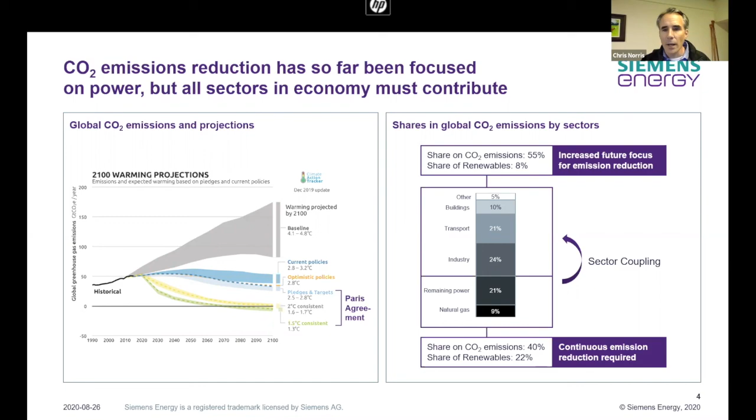This is why green hydrogen is so important. Shares in the global CO2 emissions show that buildings, transportation, and industry contribute a significant amount of GHG emissions. What we're really focused on in terms of sector coupling is how do we decarbonize not just the areas of the economy that are straightforward to decarbonize, like electrification of mobility, but how do we really decarbonize deeply the sectors that are not easy to decarbonize.

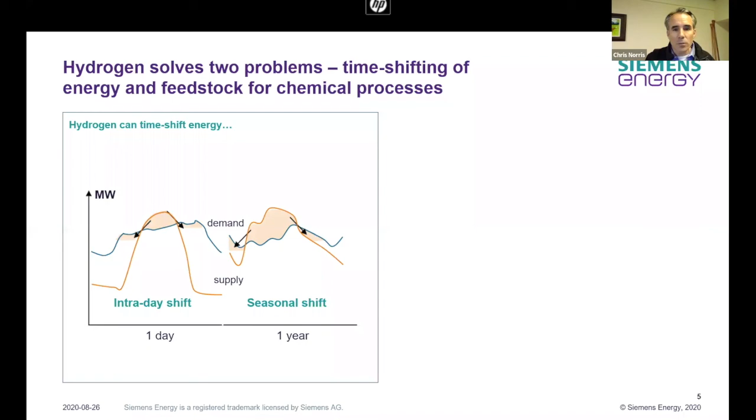Hydrogen solves a couple of problems, and the solutions hydrogen provides certainly vary by jurisdiction. We know Quebec is a unique jurisdiction in terms of how it produces energy. One of the things hydrogen can do is act as a store of energy for intraday shifting from peak supply and demand, and also seasonal shifting in terms of long-term storage in various methods available, from direct storage of hydrogen to creation of synthetic fuels.

On the right is really the essence of what we call Power-to-X, with e-hydrogen in the center, and on the left the sources of renewable power: wind, solar, and particularly hydro in the case of Quebec. We see that there are a couple of areas where the economy can focus on decarbonization through direct electrification - the top one through heat pumps for the building sector, and below through mobility.

But what we also see is that through e-hydrogen, there are a lot of other difficult to decarbonize sectors. For one example, ammonia, from which fertilizer is derived, produces on the order of 800 megatons of carbon dioxide per year, which exceeds the European production of GHG emissions from its entire electricity sector. These unseen and less than obvious sectors of the economy, which emit a tremendous amount of carbon dioxide into the atmosphere, are areas with primary interest in decarbonizing through e-hydrogen or green hydrogen.

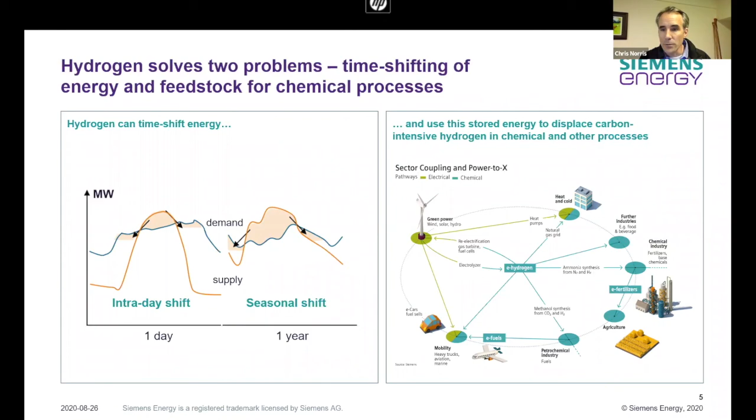I think we're all here because we realize Quebec is well poised to be a key player in the green hydrogen space. One of the things Quebec is known for is its abundance of clean energy. We see on the left an indication of where GHG emissions come from by sector, and the electricity sector is essentially too difficult to see in 2017 and onwards. That tells us the target for decarbonization in Quebec is in these other sectors of the economy.

Much of the discussion around grid modernization and decarbonization comes from decarbonizing the electric sector, but in Quebec, clearly that is well in hand. The middle image shows what is widely known about Quebec - the vast majority of electricity comes from renewable hydro generation with a tremendous installed capacity of almost 37 gigawatts.

On the right, the hydropower is produced quite a distance from consumption and load centers. That's a challenge that's been addressed by Hydro-Quebec, and it provides potential opportunities, especially in areas where hydropower is produced relatively close to deep water ports and tidewater, for export of commodities derived from green hydrogen.

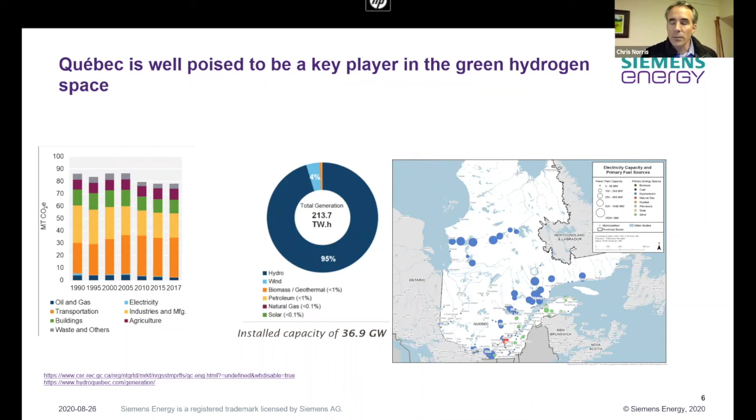So the hydrogen economy will support CO2 reduction, of course, depending on legislation and the early support of the industry, as well as the emergence of scalable solutions.

Here on the left, we talk about what are the types of hydrogen. There's a global demand for about 70 megatons of hydrogen, and as a negative side effect, there's emissions of about 830 megatons of carbon dioxide per year, just in the production of gray hydrogen.

Here we talk about the different, what we're colloquially using as the colors of hydrogen, but there's development in the sense of how we're going to define hydrogen in the form of its carbon intensity and its source. I think this terminology will serve out its usefulness as we develop carbon intensity targets for different types of hydrogen.

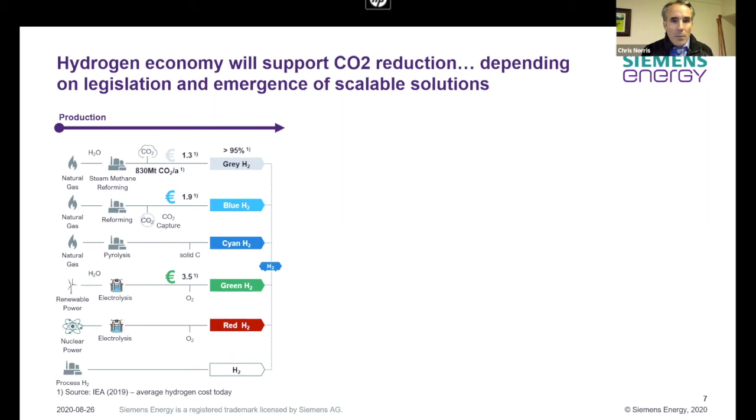But natural gas, as you can see, forms a significant portion of the global supply of hydrogen, with renewable power providing only a small portion of it currently. But that means there is an ample market and a growing piece of the pie for green hydrogen.

Now, how do we get it to market? There's several ways. One is pure hydrogen or blended hydrogen, and I think we'll discuss that more when Énergir and Catherine speak about their role in the hydrogen sector, both from a pure and a blended hydrogen point of view. There's also being able to move it from place to place in the form of liquid hydrogen or adsorbed hydrogen. And then, of course, the synfuel and chemical pathway, the creation of methanol and ammonia, both topics of significant discussion in Quebec currently.

Of course, there's the re-electrification pathway, one that is focused on elsewhere in North America. I think one of the reasons we want to highlight that in this discussion is because, despite the large demand for hydrogen in Quebec, Quebec is not only a great provider of low carbon power for the production of green hydrogen, but it has a lot else going for it in terms of post-secondary institutions, research and development areas, and a lot of things that can service markets outside of Quebec, as well as storage.

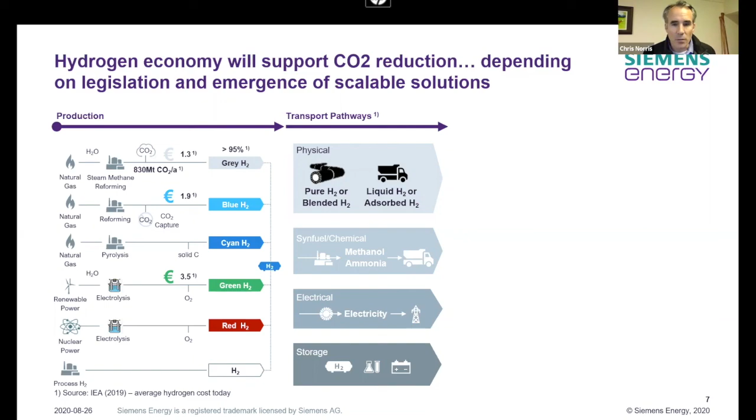Storage can be defined in multiple different ways. There's the storage of electricity where it can be re-electrified at a later time. There's storage in the sense of using hydrogen to offset future demand. And then there's the type of storage that is involved with production of a substance that will offset the demand for electricity. Hydrogen really has a role to play in each of those storage types.

From a consumption point of view, all I want to convey here is that there is tremendous demand for hydrogen globally for multiple different uses. And the question is, how do we use this opportunity to substitute green hydrogen for the type of GHG intense gray hydrogen that has been the source of most of the hydrogen in the past.

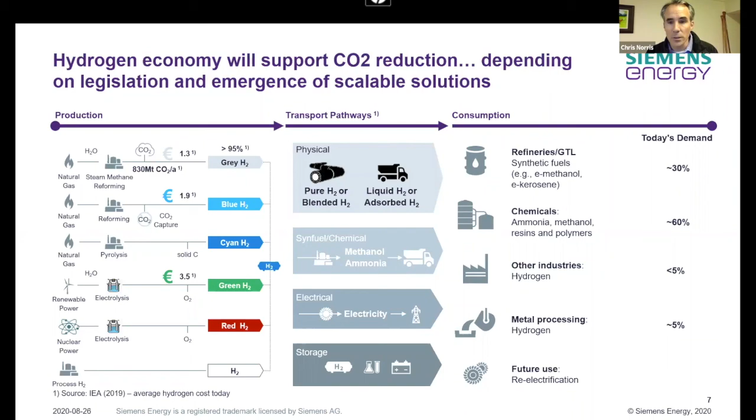So I hope this sets the stage for the reason that green hydrogen is so important, especially in the Quebec economy, in the Canada economy, and also in the post-COVID recovery stage that we're in the economy.

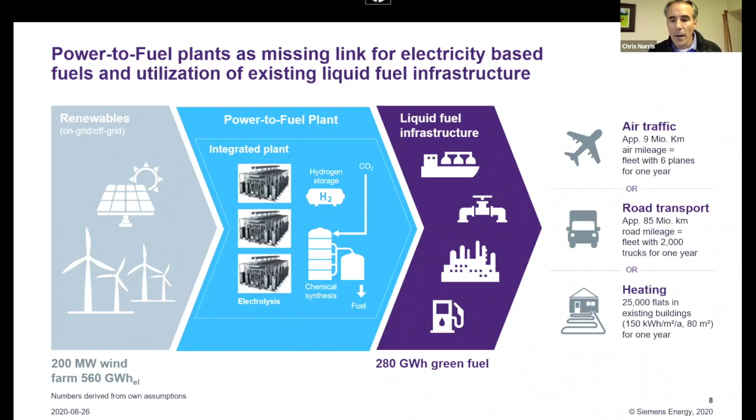And with that, I want to turn it over to my colleague Omar, who's going to talk a little bit about the Siemens offerings. Thank you, Chris, and thank you everyone here for the opportunity. I will be brief in my presentation, but I will basically cover some important points so that hopefully will trigger some thoughts and ideas for discussion later on.

So Siemens has been in the business of electrolyzers since 2011, where we basically developed the technology and we did it at a lab scale demonstration facility where we eventually transitioned into commercializing the product line with the Silyzer 200, which is an electrolyzer that draws roughly 1.5 megawatts of electricity to produce hydrogen.

Our current portfolio consists of the Silyzer 300, which I will describe in more detail in a little bit. This Silyzer 300 draws roughly 17.5 megawatts of electricity to produce 340 kilograms of hydrogen per hour. What's important about this slide is that we at Siemens have developed the technology in such a way that we are modularizing our designs to eventually scale up the amounts of hydrogen that we can produce.

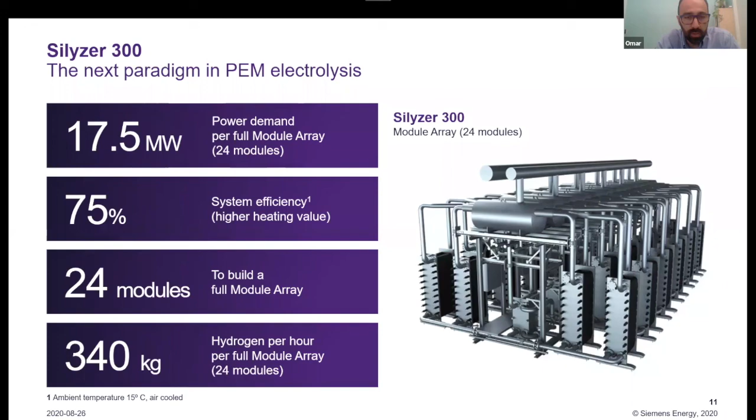So when we talk about this electrolyzer, the Silyzer 300, I mentioned already the draw of electricity. It has an efficiency of 75%, and it's a modularized design. The reason for that is so that we can scale it up in the future in modules to be able to reach higher quantities of hydrogen production per day. It draws 17.5 megawatts of electricity, and it produces 340 kilograms of hydrogen per hour. If you move on to the next slide, please, Chris.

So one important topic we need to discuss is efficiency. When I showed the first slide, I mentioned how we want to scale up hydrogen production. In terms of efficiency, we expect that this will continue to develop. However, there's only so much we could do with the thermodynamics or the mechanical aspect of efficiency in this case. But our PEM electrolyzer has an efficiency per module of more than 77%.

Now, when you start considering all the transformer heat losses, the rectifier losses, and all the auxiliary system losses, you basically get to the 75% efficiency aspect. This PEM electrolyzer delivers hydrogen at atmospheric pressure, which means depending on the end use of this hydrogen, you will probably need to compress it. So when you add the compression and cooling systems to the balance of plant, your efficiency will go down to 74%, and then eventually you will end up roughly at 72% at the end of the entire balance of plant.

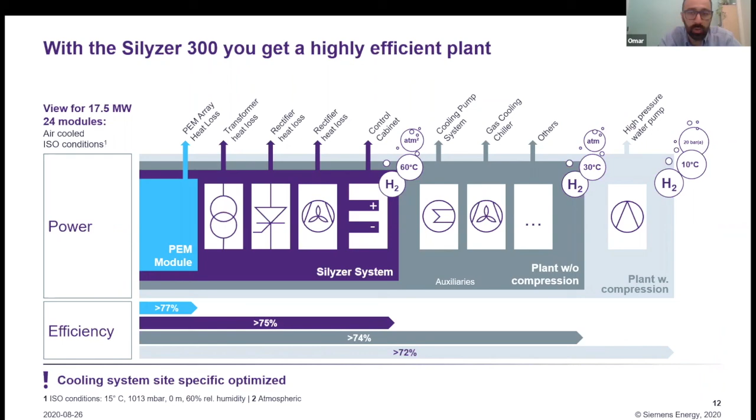So what I wanted to convey is that we can only tweak so much in each one of these aspects, and eventually, hopefully, we'll be able to continue to improve the efficiency to higher levels as we develop more efficient systems in each one of these auxiliary systems. Would you mind moving to the next slide, Chris?

One important aspect of the Siemens electrolyzer is that, because of the background Siemens has in the energy industry and power generation, we made sure that the Siemens electrolyzer provides good dynamic response. So one of the key characteristics of this electrolyzer is that it could be turned on within 60 seconds, delivering full hydrogen production within those 60 seconds, and then you, as the operator of the electrolyzer, being able to ramp it up and down in a dynamic response range of 10% per second.

So when you look at this, you can consider it as a grid support service. And when we talk about grid support service, we can think of many different aspects, but for now let's oversimplify it as an electrical load that can satisfy demand response. The rectifier load of this electrolyzer can reach full load being consumed within 30 seconds of turning on the device, and like I said, we can also turn it up and down at 10% per second as necessary.

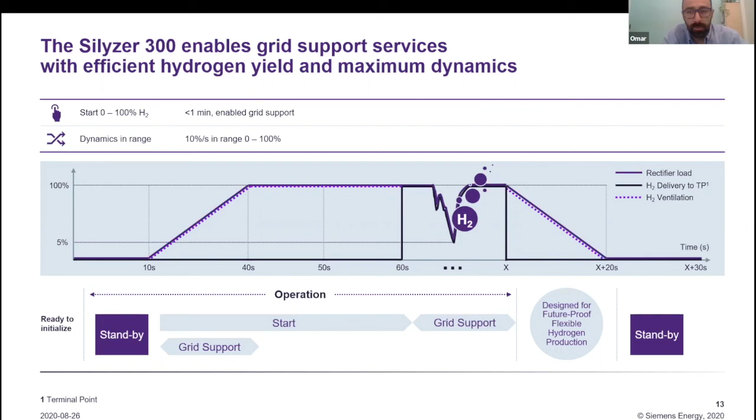So would you mind moving to the next slide, please? The electrolyzer itself, I mentioned it earlier, it's not only the electrolyzer, but it comes with the entire balance of plant aspect that needs to be considered when we're looking at Power-to-X aspects. I don't think there's much to talk about here, just wanted to show a pictorial aspect.

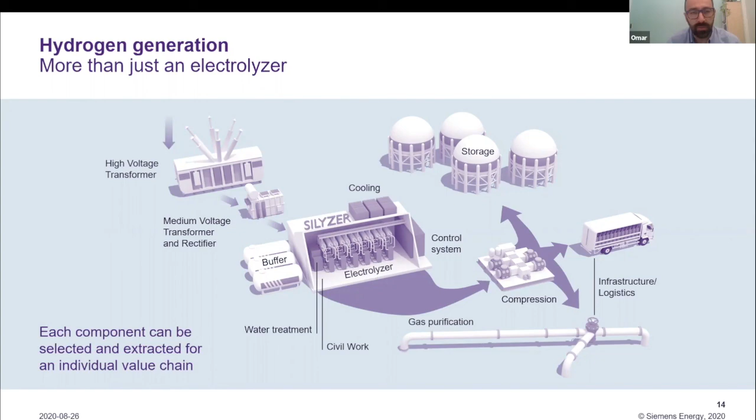But what I do want to talk about, maybe on the next slide, is that Siemens has a vast... would you mind moving to next, Chris? Thank you.

Would you mind moving to the next slide, Chris?

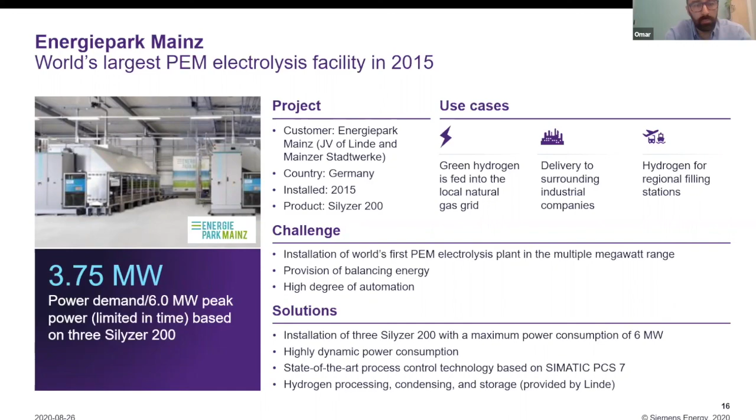So with that, I wanted to show you two business cases and examples of what we have done. One is the Energiepark Mainz, a project in Germany installed in 2015. It's a Silyzer 200, and the interesting thing is that it receives energy from a nearby wind farm and produces green hydrogen, which is used for multiple purposes: blended into the natural gas grid, delivered as feedstock to surrounding industrial companies like fertilization, and used for local hydrogen fueling stations for the transportation sector. So this is a good showcase for the entire application of Power-to-X technologies.

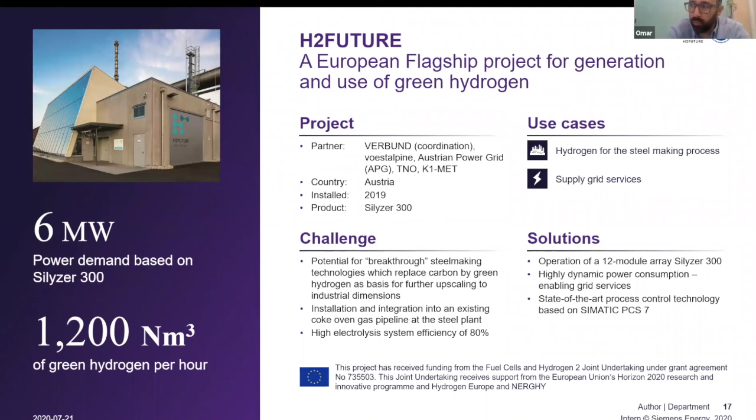Then we have the H2FUTURE project in Austria, where an electrolyzer is used to produce hydrogen that's used in a breakthrough steel making technology process, where the carbon typically used in steel production is replaced completely by green hydrogen. One of the use cases is not only for the steel making process, but the electrolyzer also provides dynamic response capabilities for grid support services in the Austrian region where it works. And with that, I would like to pass this on to Nakul.

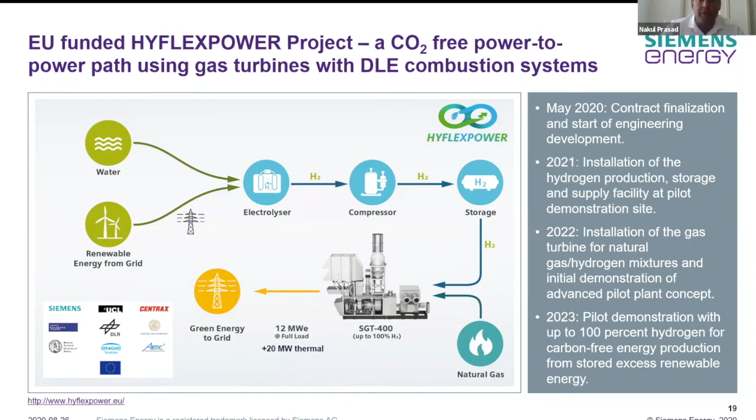And that brings us to the gas turbine part. As we've seen, gas turbines can play a very important role in this hydrogen economy because we have tens of thousands of gas turbines running already worldwide. So upgrading these gas turbines requires some effort, but it's a manageable effort in terms of capital expenditures and R&D.

To give you a snapshot of our portfolio of gas turbines, and what they can already burn in terms of hydrogen content capabilities, the graph is shown here. You can see in our portfolio we have gas turbines ranging from roughly 4 megawatts to close to 600 megawatts in simple cycle. If you run these engines in combined cycle, you're close to a gigawatt at maximum power output. The range from 100 to 600 megawatts is what we refer to as utility scale, and the smaller range is the industrial scale gas turbines.

On the utility side, we can see that most, or actually all, of the engines are already capable of burning 30% by volume hydrogen, using low emission burners - dry low emission burners, meaning there's no water required to abate your NOx. So they comply with any NOx regulations, like 15 to 25 ppm, without using any additional water.

We have a range, the A65, A45, and A35, which are aeroderivative units, and they can be delivered using both dry low emission systems and wet low emission systems, meaning diffusion burners, conventional burners, but using water to abate NOx. And these engines can already run up to 100% using these WLE burners.

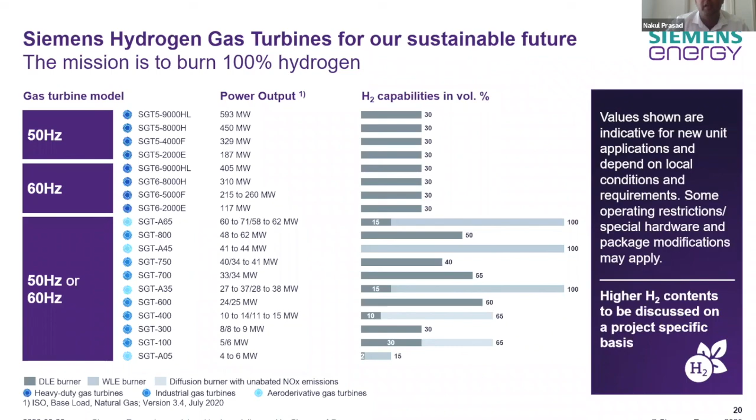And specifically for gas turbines, it's been a talking point because hydrogen often appears as a waste gas in industrial processes, in refineries for instance, or even the steelmaking process. And there's two options: either you flare that gas or you convert it into energy. And that's what gas turbines have been essentially doing for decades now already.

And if you go to the next slide, please.

So we've seen 30%, 60%, and so on. But to really reach our ambition of decarbonizing the entire fleet, running on 100% hydrogen, and in fact we've made a pledge to do that by 2030, still requires a bit of development. And that's shown by the graph here, what the challenges are.

So a couple of things about hydrogen. Obviously it doesn't produce any CO2 because it doesn't have any carbon bound, but it has other challenging properties which need to be managed, especially when combusting these gases. It's got a higher diffusivity, it's the lightest element, so it's very diffusive. We need to make sure that all the sealings and piping systems are managed to accommodate hydrogen, avoiding embrittlement, for instance. It has a lower volumetric energy content, so overall you need larger volume flows to be handled by the fuel system. But the key point is really hydrogen is very reactive.

Everybody knows it, it's very explosive. So what it does is shown in the graph here. On the x-axis, you can see the content of hydrogen per volume, and on the y-axis you'll see different physical effects. The orange line is showing the so-called flame speed, which is kind of characteristic for the reactivity of the flame.

As you can see, at 10%, for instance, in these images, just for orientation, the flame is moving from down to up, so the flow is moving from down to up. We can see that the flame is very distributed, somewhat anchored downstream of the combustor. But as we increase the content of hydrogen, the flame moves faster and faster towards the burner. At 90%, we can see the flame is very compact, very much attached to the burner rim, and it's very faint as well, so there's some detection issues as well.

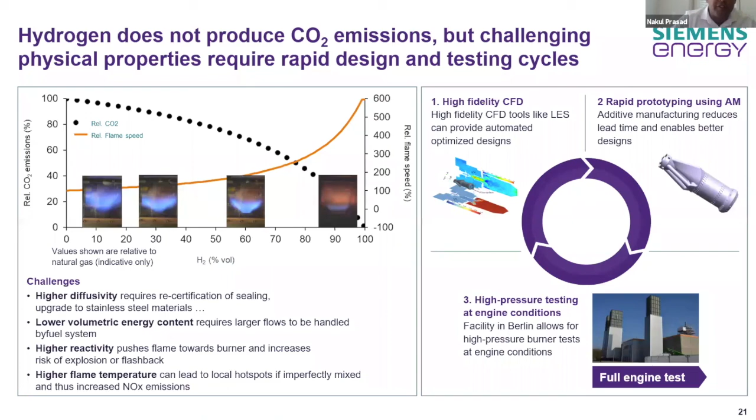So we've seen in the previous slide, a lot of engines can already do up to 30%, but reaching 100% still requires quite a bit of work. So that's something we need to overcome. And we do this shown on the right in a rapid prototyping cycle.

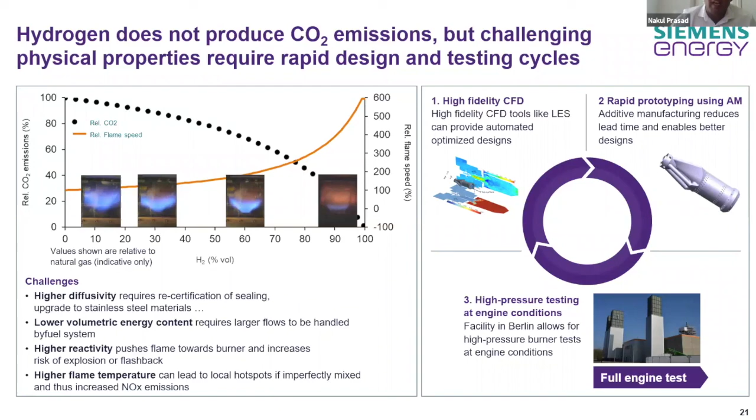Our CFD, our design tools have become much better, computational fluid dynamics. Now we can do time resolved simulations of the flow field, which allows us to do more high fidelity optimization, even automated. And we can print these designs very quickly now using additive manufacturing. Additive manufacturing is a core component now at Siemens, a core manufacturing design, which has not only helped us improve the speed of these designs, but also gives engineers more leverage to play around with much more sophisticated designs, which they couldn't manufacture in the past.

And then we need to test this in a high pressure burner testing rig. So first in a test rig and then in the engine, because it needs to be full pressure, since all of the effects shown before, such as the flame speed, are effects which amplify at pressure. So it needs to be tested in engine conditions.

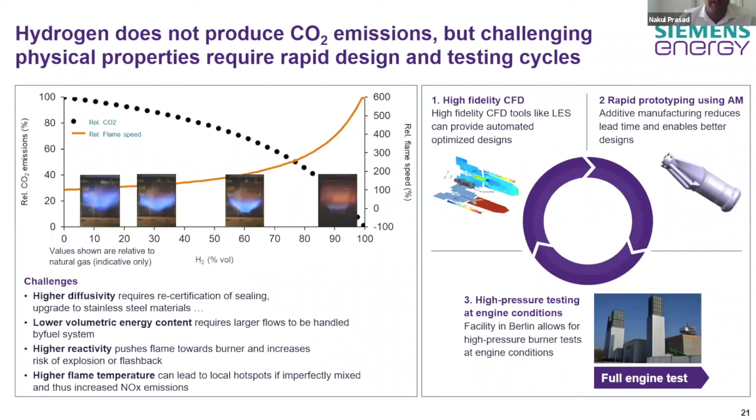And once we've done that cycle, optimized the burners, we then go into the full engine. And if we go to the next slide, just one recent example for one of our engines.

So that's an SGT 600 engine, which is about 25 megawatts rated. We started this with a bit of CFD, then we went into an atmospheric test rig to try and see how the design was going.

We managed to get to 100% using dry low emissions, which was a good achievement. As the next step, we went into a high pressure test, and we were able to reach up to 100% again, which validated what we'd seen.

However, we saw that it increased NOx, at about 40 ppm compared to the 25 ppm we're offering. But that was just the first run. It was a really good testing experience because a lot of the challenging effects, such as flashback and other thermoacoustic effects, were not prohibitive in operating this burner.

So as a next step, we actually went into a full engine. We did some engine tests and were able to replicate quite a few of the tests we'd done in the high pressure test rig. But since this was design version 0, it now went back into the design cycle. Hopefully we'll see this develop rapidly and offer this engine commercially at 100% DLE in the next years.

And if you go to the next slide.

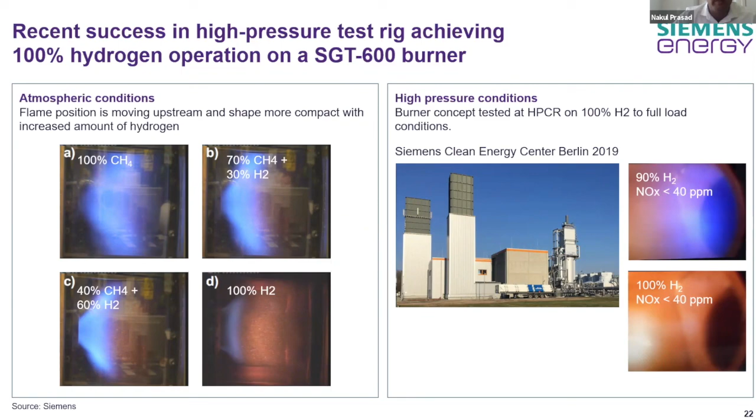Finally, just to add again, talking about stranded assets - I mentioned there are tens of thousands of units operating. Stranding these assets is not an economical choice, especially since gas turbines are very flexible and are actually very good peaking and renewable backup solutions.

But basically what we need to do is look at the fire protection systems, make sure the electrical equipment is upgraded to accommodate hydrogen, looking at the auxiliaries as well, and things such as seals, piping systems, and so on. But the main one is really the burner adjustment and exchange.

But the majority of the core remains unchanged, so that's also something which is very sustainable. Whatever we do in terms of new unit development for gas turbines is something we aim to retrofit into most of the versions of the already operating assets. So again, it's bridging the future and the present through this kind of sustainable path via upgrades to gradually decarbonize existing assets.

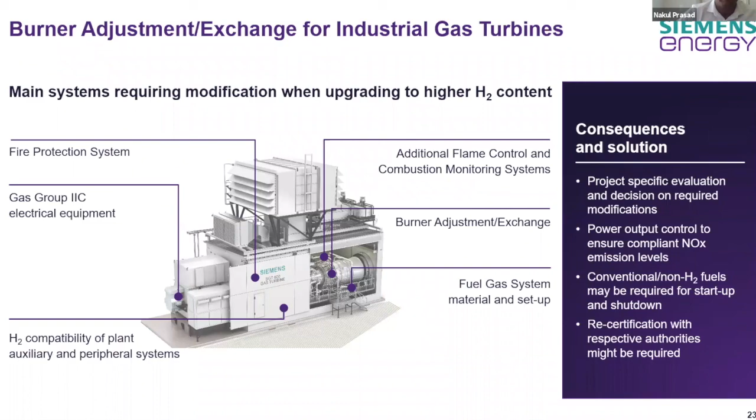And if we go to the next slide - that's already the end of my talk. I'll hand it back to Chris. Thanks, Nakul. Yeah, I just needed to get off mute.

Okay, so thank you very much, Omar and Nakul, for that presentation. To sum up, we've talked about the importance of decarbonization in the energy system and the role that low carbon fuels, including hydrogen, play in that. We've talked about sector coupling, which is not just electrifying industry, but electrifying those very difficult to electrify industries - chemicals, petrochemicals. We've talked about Power-to-X, taking hydrogen and going to many different uses. Nakul gave us examples as they pertain to gas turbines.

Certainly power generation by gas turbines is more of a directly related subject in many of the other areas in Canada. Of course, with Quebec and its high hydro penetration, it's less direct. But the reason we wanted to spend some time on that is because the hydrogen industry is going to have so many other follow-on effects in order to make it a reality. We know that Quebec has a strong aerospace industry, and Siemens is part of that with respect to our aeroderivative gas turbine engines.